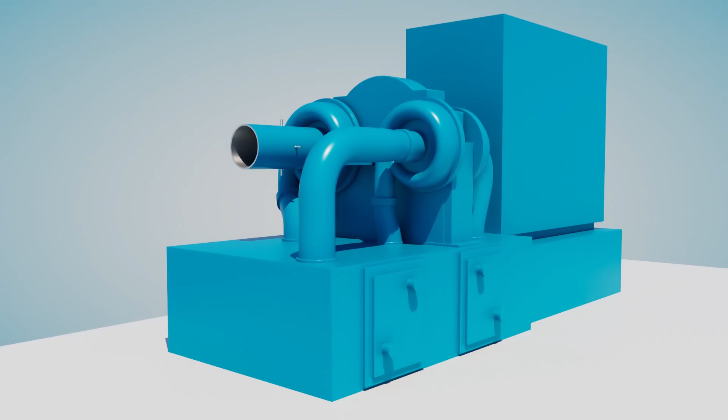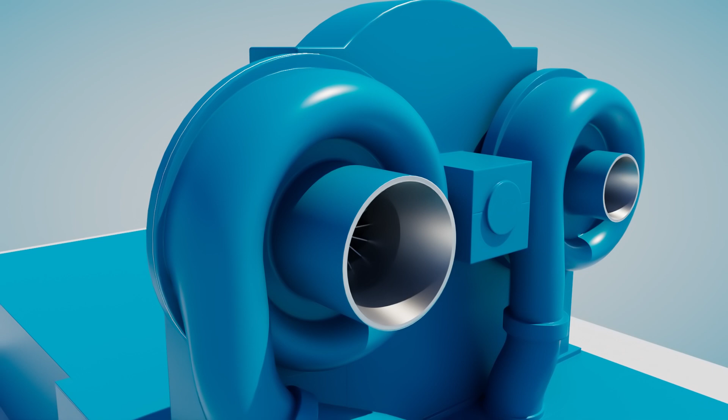The air compressor system of the power plant is divided into instrument air system and service air system. The instrument air system is an air system that provides compressed air which is being dried through the instrument air receiver and air dryer to the pneumatic automatic control instrument and other measurement control instruments.

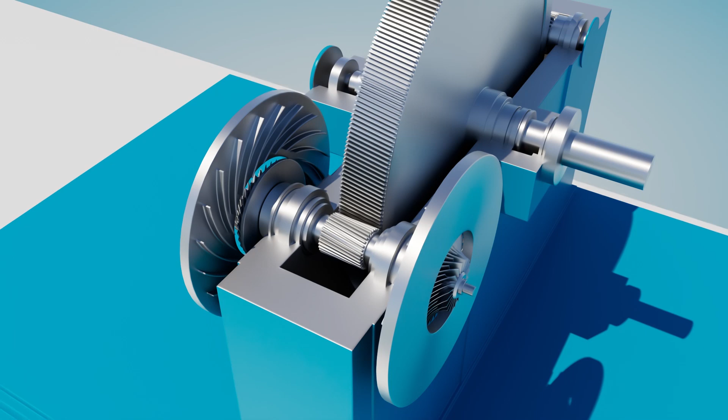Service air system is an air system that provides compressed air directly to the direct air-driven tool, boiler oil atomizing air, and air preheater air-driven motor.

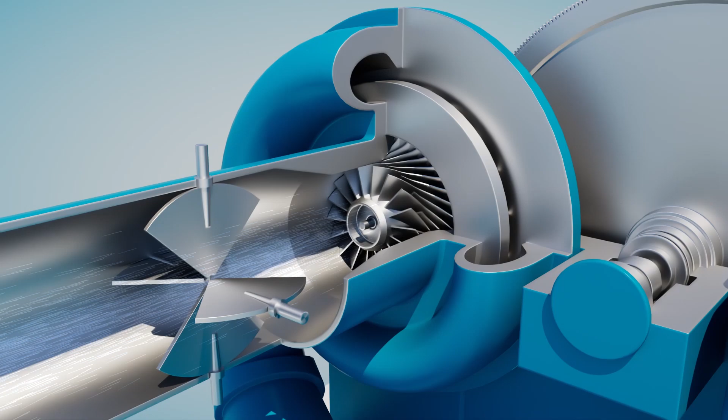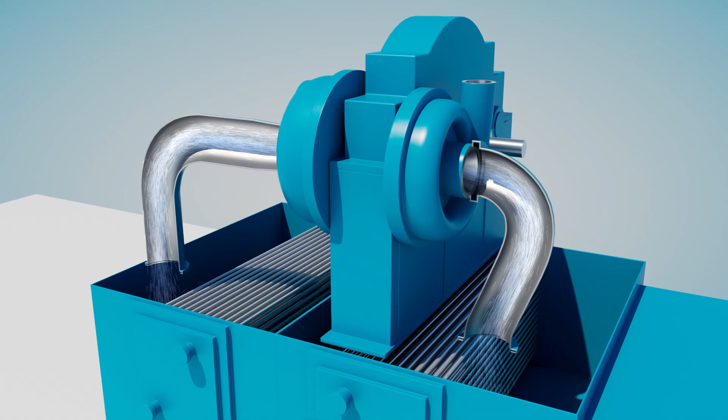Instrument air system and service air system are composed of 4 air compressors, after cooler, 2 service air receivers, 1 instrument air receiver, and 2 air dryers. When in normal operating, 2 air compressors provide compressed air at the same time to the instrument air and service air systems.

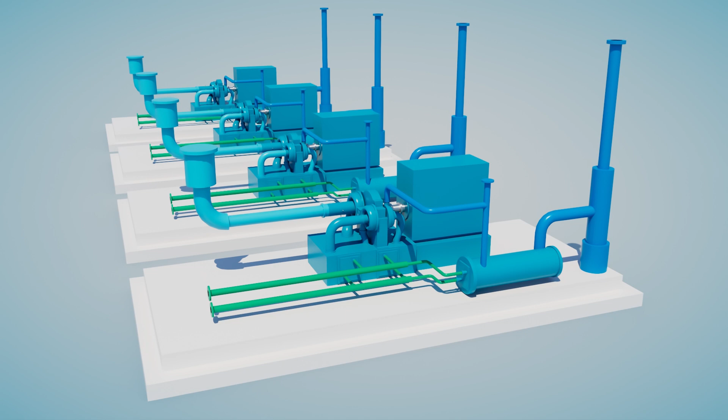The standby air compressor automatically operates when the air receiver pressure is under 7.4 kilograms per square centimeter gauge.